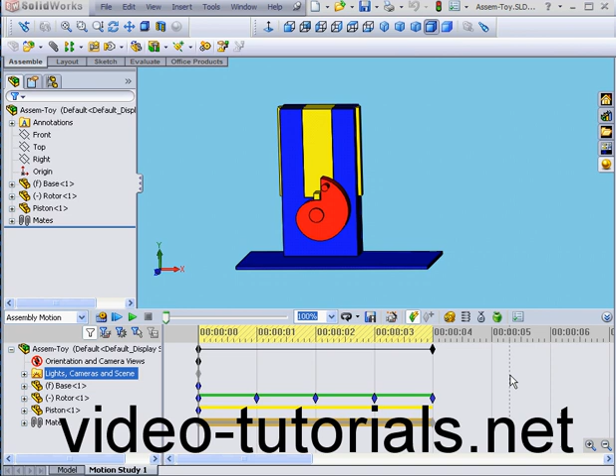Welcome to our tutorial on using angular mates. We're going to pick up where we left off in our previous tutorial with the toy. In this tutorial, I'm going to use angular mates instead of distance mates to rotate the rotor.

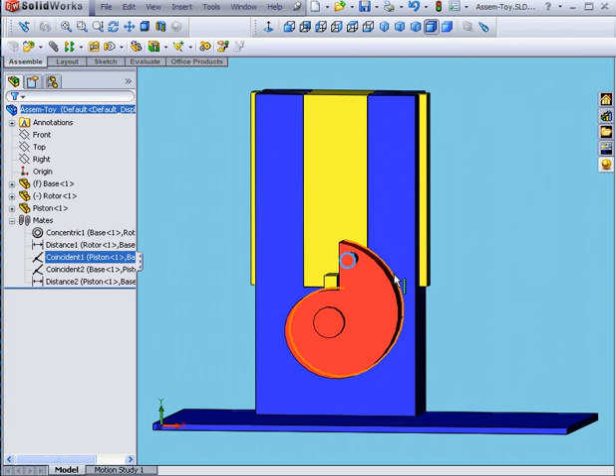Let's exit Motion Study. Go back to our model. Currently, I have two mates for this rotor, concentric and distance. The distance mate is simply an offset between the rotor and this face. I'm going to click Mate. Let's right-click and clear selections.

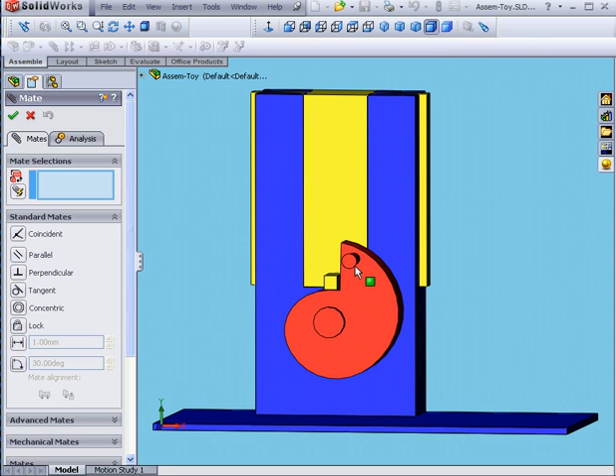I'm going to create this mate in a way so that the initial rotor position is 0 degrees. And then it'll move to 90, 180, 270, and 360. It's easy to do this way, and it's less confusing for SolidWorks too. I'm going to select this face, and then this face. Now we select Angular Mates, enter the value at 0 degrees,

Tab, OK. Next, I need to check the angle calculation clockwise. Basically, I increase the angle value, and the rotor moves in a clockwise direction. If that's not the case, simply check Flip Dimension. Let's go back and enter a value of 0, Tab. At this point, I'm ready to click OK, and OK.

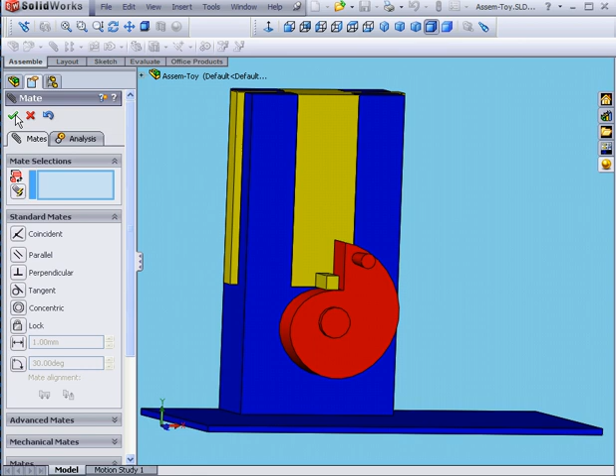Let's return to the Motion Study tab. SolidWorks asks me if I want to update the time 0 keys back to valid positions. Let's click Yes. Previously, the key was red. Now it's blue. Let's highlight our key points and delete them. Next, expand the Mates branch. Here's my angular mate.

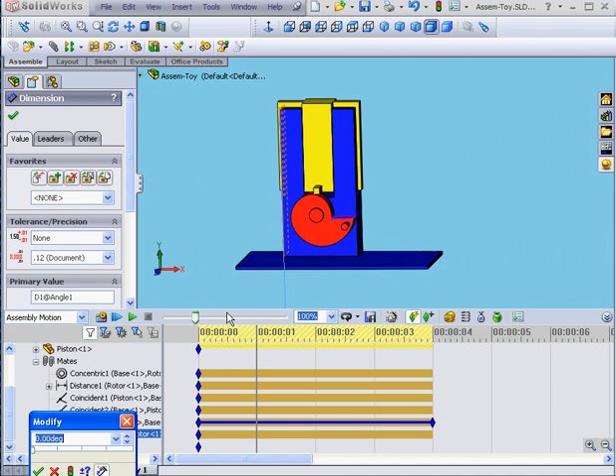Let's bring the time bar to the 1 second mark. Double-click on our angular mate. Let's move the slider to 90 degrees. OK. Let's drag our time bar to the 2 second mark. Double-click on our angular mate. Move the slider to 180. OK.

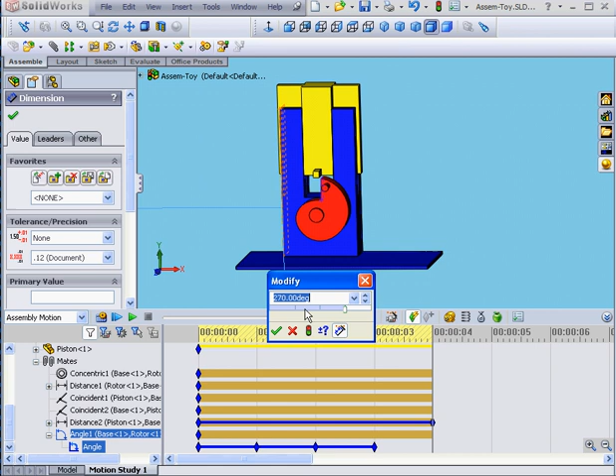Now let's move the time bar to second 3. Double-click on our angular mate. Slide up to 270 and click OK. Our last move is at the 4 second mark. We double-click and move the slider to 360. Let's click OK. Now let's calculate. Here is our preview. Everything seems fine. Let's press Stop.

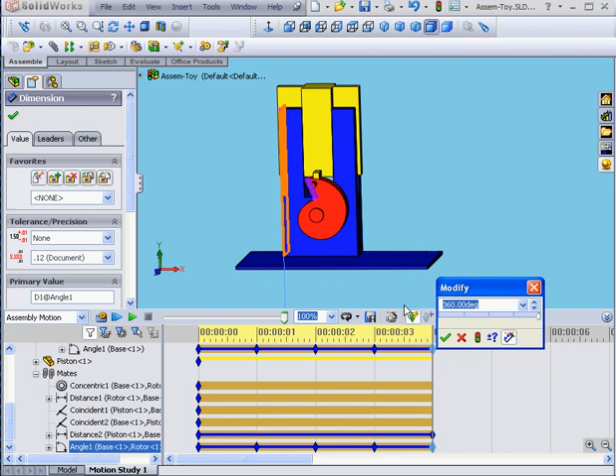In a situation like this, it's important to watch for this particular problem. Let me double-click. 360, as you see, is actually equal to 0 degrees. But if I put in 0 and click OK, let's recalculate to see what happens. Let's press Stop. You can see that the rotor doesn't move consistently in one direction.

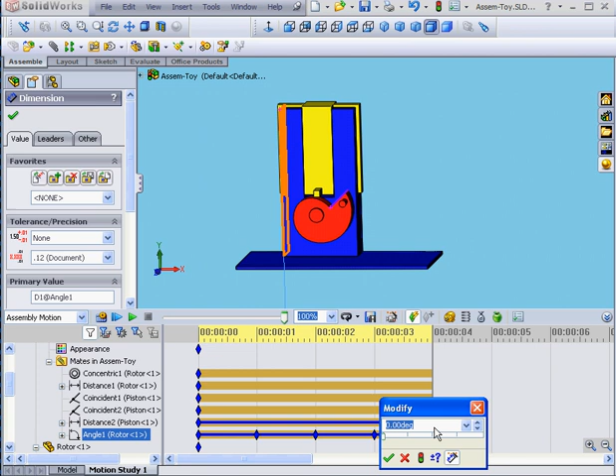Let's return the value to 360 degrees. Double-click. Move our slider up to 360 and click OK. Now let's run our calculation. Each time you make changes, you need to make sure you run the calculation. Now everything appears to run fine. Let's click Stop.

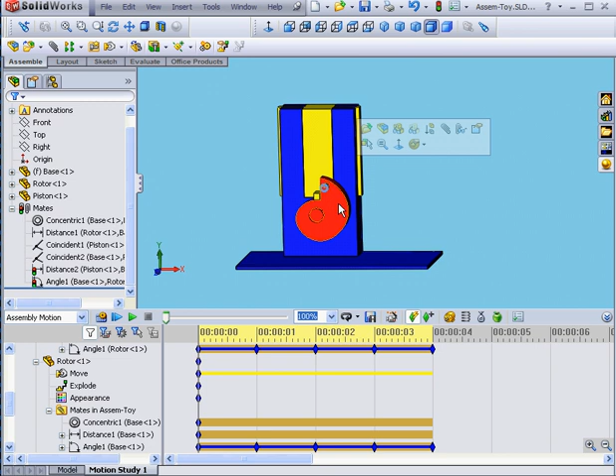For the initial position, if I'd used this face, for example, it would have made the initial angle 90 degrees. I'd need to have calculated starting from 90 degrees, then 180 here, 270 here, 360 here, and back to 90. Unfortunately, this probably would have confused SolidWorks, and we would have ended up with some similar inconsistency in our animation that we just saw when I changed the value from 360 to 0 degrees. You need to watch for these types of issues when using angular mates.

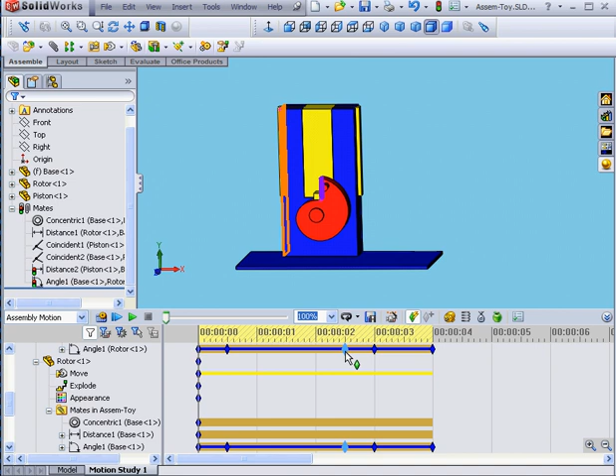In a situation like this, I could have simply used 2 key points at 0 and then 360 degrees and no intermediate points at all, but they are useful, for example, if I want the rotor to move at, let's say, different speeds. Of course, in order to match the piston movements, I need extra key points in the distance mate's change bar. I'm going to skip this for now and click Calculate.

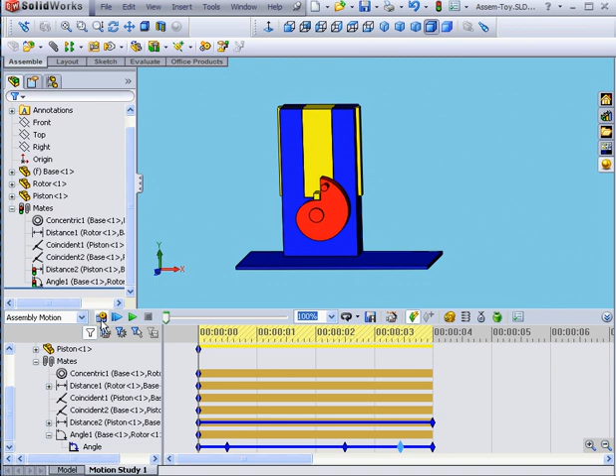You see now that the rotor moves slowly, and then it speeds up. However, the movement of the piston doesn't match the movement of the rotor right now. Let's click Stop, and this concludes our tutorial on using angular mates.